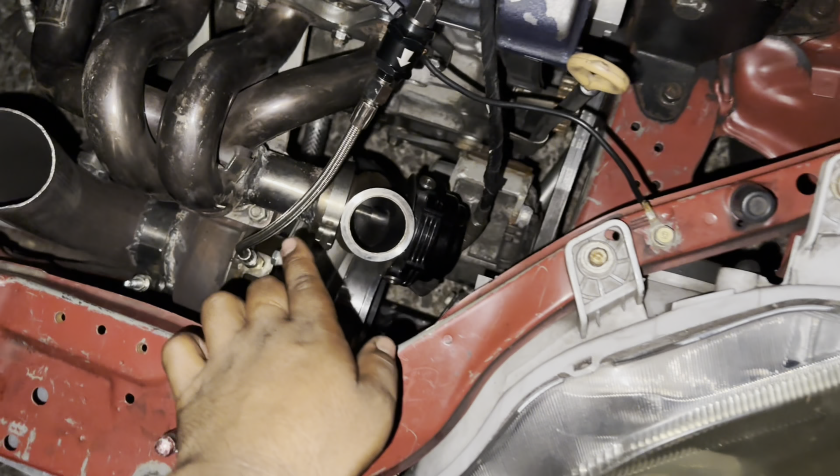What's going on, guys? So the other night I went ahead and cut that little wastegate off and welded on a 44 millimeter. We're gonna see if we can stop the boost cut. The boost creep.

So we're gonna do our first test rip. I went ahead and lowered boost cut to 15 and turned off VTEC. So we're gonna get another baseline, no VTEC, and see if we can target that 8-pound spring on this 44 millimeter wastegate. We'll just do like a quick third gear zip.

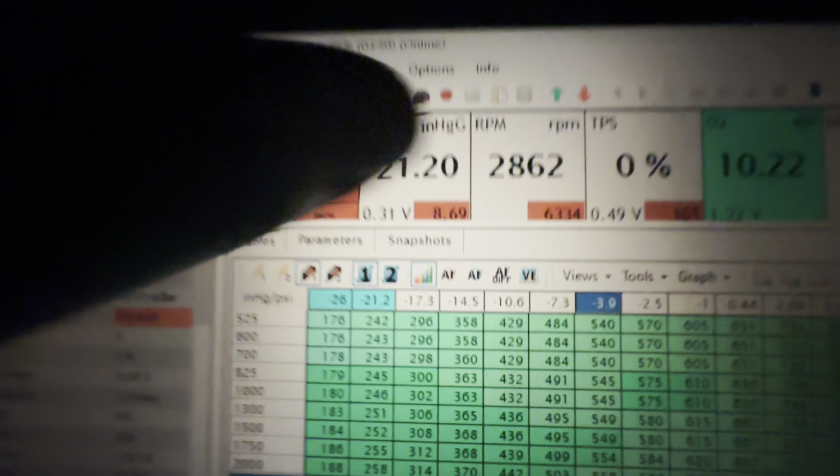Right there, guys. 8.6. You heard it open. All right, now that's no VTEC, so the real problem is going to come in VTEC. So as long as we can do that in VTEC, I'm okay with anything under 15. So this is supposed to be an 8.7 or 7.8, something around an 8-pound spring in the gate. And y'all can see right there, 8.69 pounds.

It was a little lean, but it's okay for air fuel. We'll look at the log. Actually, I didn't data log it. I'm just gonna turn on VTEC. All right, guys, we turned on VTEC. Fourth gear. Yeah, let's do a fourth gear. We're gonna do a fourth gear pull.

We almost hit 9 pounds. Got a little bit of work to do. I'm gonna stop the data log. We're gonna check things out. But that was a solid ass rip right there, guys. So I fixed the boost creep pretty much by putting that 44 millimeter gate on.

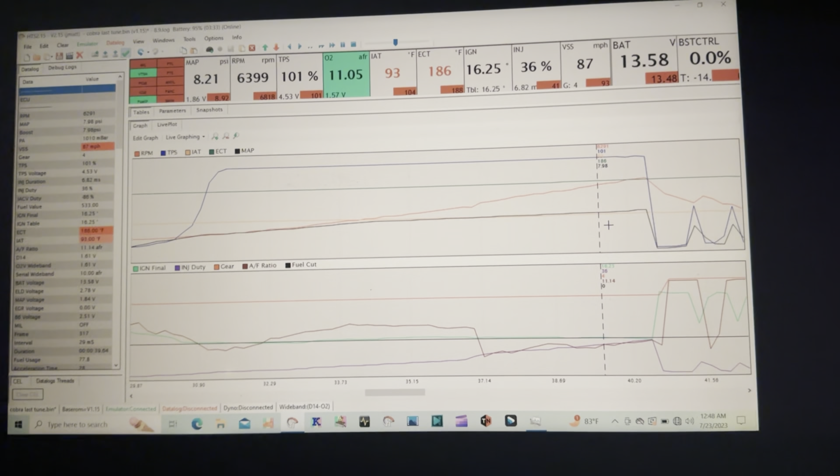I was hoping it would creep a little higher because now we're on just really low boost. But I'm gonna dial in the air, fuel, and ignition. And I wanna go to the track before I break this thing. I'd rather break at the track and get some passes out of it. But 8's pretty low, so we might do something. We'll let you guys know after the log.

All right, guys, I don't know if y'all can see this, but right here, I just want to point the curve out. So that blue line's when we go at full throttle, and the black line's MAP. So this thing came up to boost and just held flat. Now we had a small little spike where it hit 8.9 for a split second, but the peak you could see it stayed at 8 pounds, even in VTEC.

So. And don't mind my chicken foot. Don't mind my chicken foot.

He let off at 6,800. So we're going to see if we can get to the limiter now, which we should be able to. Fuel looked good. It was actually rich, and it was starting to lean out. There's a rich dip. Non-VTEC, I'm not really worried about it. But in VTEC, you see right there, it tanks into the low 10s. And then it comes back up to the 11.

So we're just going to try it because the air fuel next to limiter is damn near perfect. So we're gonna try to hit the limiter in fourth gear, and it does kind of suck, guys. This thing has no top end because we're on a small tire and B16 trans, so this isn't gonna be no fucking roll racer or nothing like that. But yeah, I just wanted to share the log, and that's only 15 degrees of timing.

So we're gonna see where it gets to, and that little dip may smoothen out with some timing. So you can see we're at 16 degrees, and then where it went down to 15 degrees, it could start causing too much EGTs. So once I add a little timing, hopefully we'll see boost taper off back down to 8.2. So we'll get back with you on that fourth gear pull all the way to the limiter. All right, guys, the log looked good enough to me, so we're gonna go ahead and try to get it all the way to the limiter.

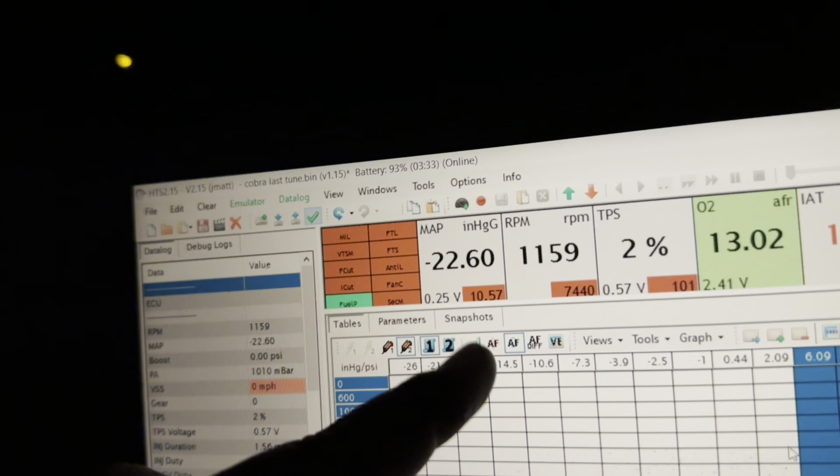It's just 8 pounds. There we go, another fourth gear rip all the way to the limiter. It actually did boost creep this time. Made it to the 7400 RPM limiter. We went from 8, and I felt it ramp at around 68. I felt that last couple hundred RPM kind of start to get away from the wastegate a little bit, but that's nothing to worry about.

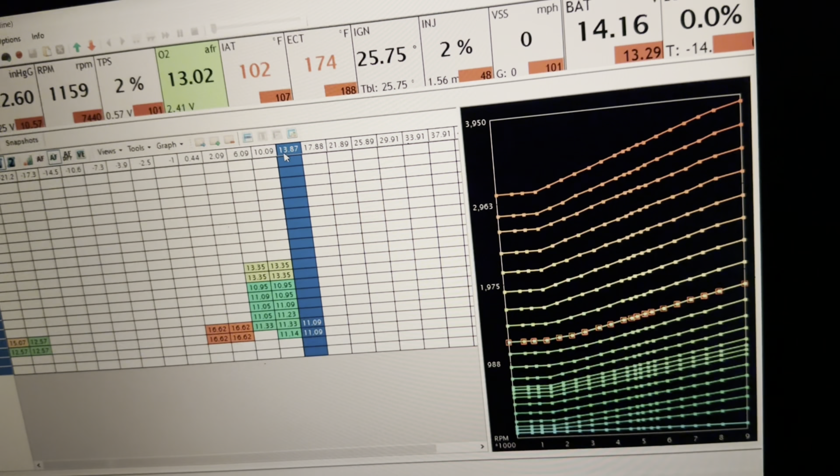The only thing is, when you get boost creep, it kind of messes with your air fuel. So we're steady in the 10-pound column, and then when you boost creep to another pound or two, you're gonna hit the next column or break point. So I gotta tune that and smooth it out. And then I raised VTEC, which also seemed like it hit really late, but we'll do some more tweaking.

Yeah, we'll do some more tweaking, and we'll get back with you. Forgot to log this time, but we did boost creep a little bit. But we're gonna run it out again so I can get a better data log.

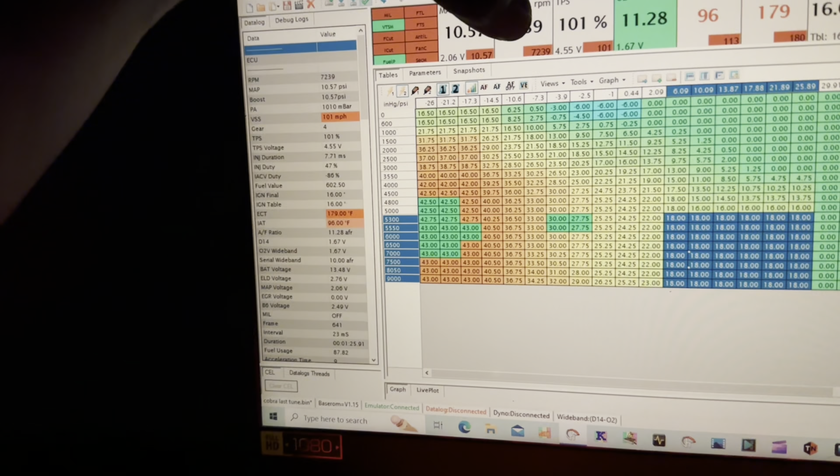Alright guys, so it was boost creeping up top, and I think it could be because I had the timing too retarded, so I added 2 degrees in some spots, but we're gonna see if we can reduce some of it. But we're gonna have to turn around. At about 7,300 RPM, it boost crept from 8 to 10.5. Before that, it went to 11.5, but I added 2 degrees of timing, so I'm holding back the engine on timing. So I added another 2.

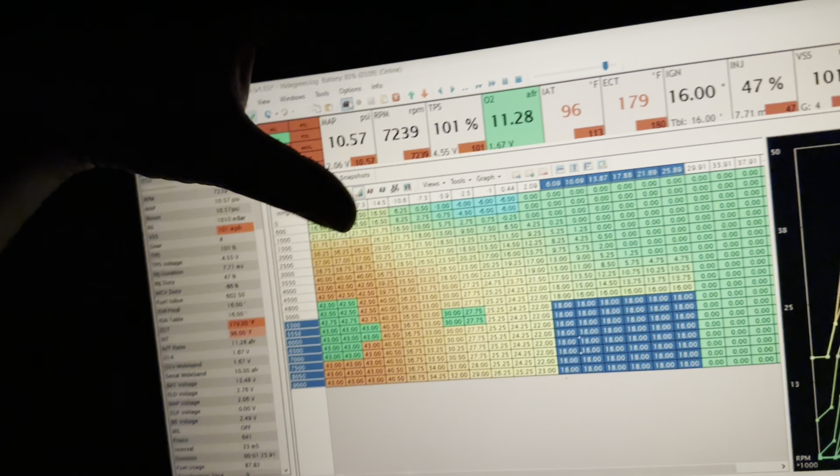We're gonna see if 18 lowers boost even more, just that way we know we're not making the engine struggle because of the ignition advance. If it does lower there, I'm probably gonna turn up boost, because I don't want to get crazy on timing with this stock block. But as long as it's a little more efficient than it is right now, I'll be happy, and we can take it to the track. So let's

Runway is kind of short, so we got to run it back. Usually try to turn around and get a long stretch. I can't wait to get a dyno, guys. I know I try to show y'all this street tune action, but man, I really do get burned out with it at times.

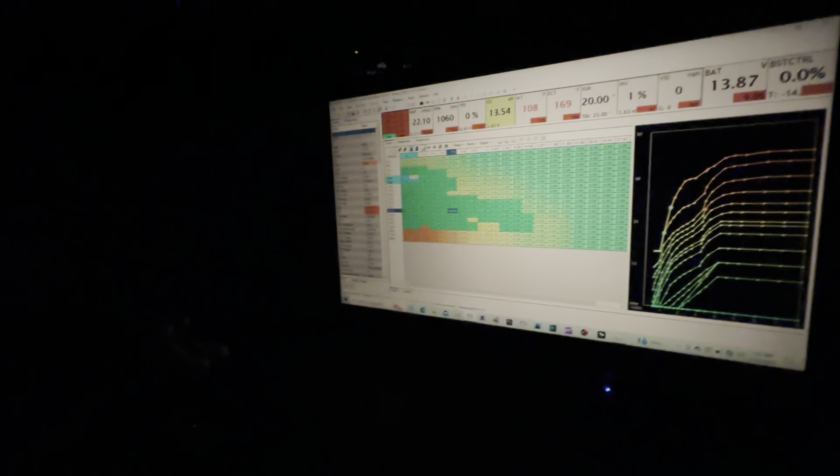Out. All right guys, so we kind of reached a little max, not a max, but I can kind of tell what cylinder pressure is starting to do with the changes in ignition, and we still hit 10.5 pounds. So the 2 degrees really didn't make the engine any happier. It felt a little smoother, but on the street, guys, I really try not to go too crazy on the timing. So we're gonna read the plugs, make sure there was no det on them, and then we'll leave it there. And really the way to turn up the power from here is going to be more boost.

Do a fucking pull. Right. I'm recording now. Ready? Yeah. That sound like shit, right?

Alright guys, so I just tried to do a little launch and there was a really rich spot, so it kind of put the flame out a little bit. So I'm just going to do some more drivability and get the tip in a little cleaner.